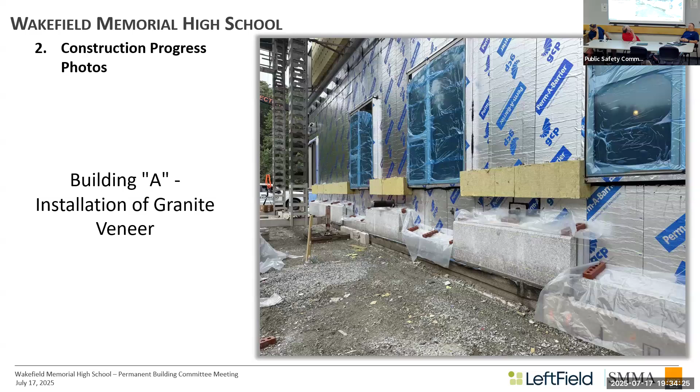How many crews did they have going today? Right now the lighthouse is only doing one crew. Once we get up to elevation, to kind of the roof line, a second crew is gonna go on the roof and work their way around. Then once they're done, they'll drop down at E and start working their way around, trying to meet somewhere probably around the end of D buildings. But they only have one crew laying this whole side? Yeah. Interesting.

Yeah, it's kind of like a blown out shot of it. You can see the Z-girts that Sunrise installed. Lighthouse right now is installed on the mineral wool. Well underway. Who sets the first brick?

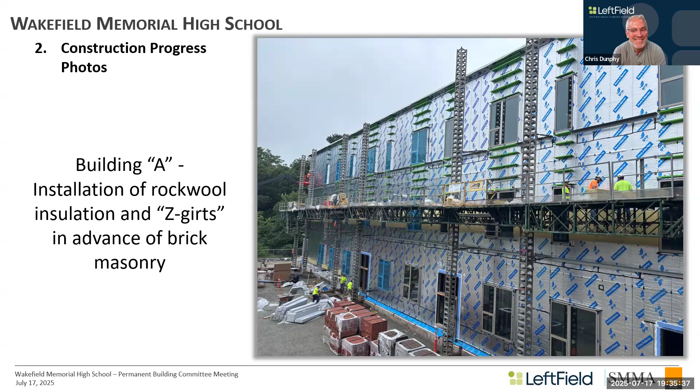How cool is that? Random. Maybe a million brick lottery. We'll let Marcus do the first brick. One brick, so it's really... And then they'll take it off and do it right. Yeah, not amazing. All right, next photo.

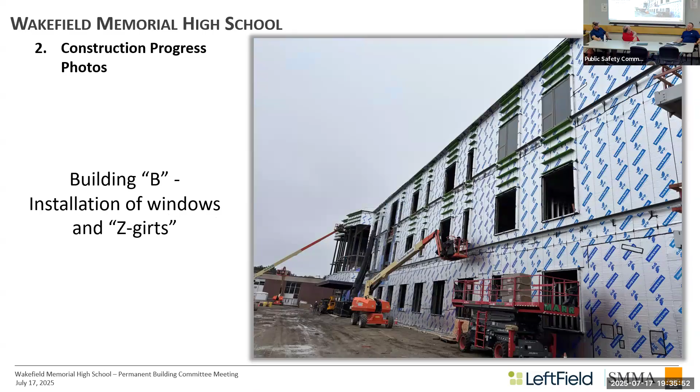Okay, so this is the west side of building B. You can see they're installing windows. You can see the sheathing going on, just kind of getting ready for the mason to come later on.

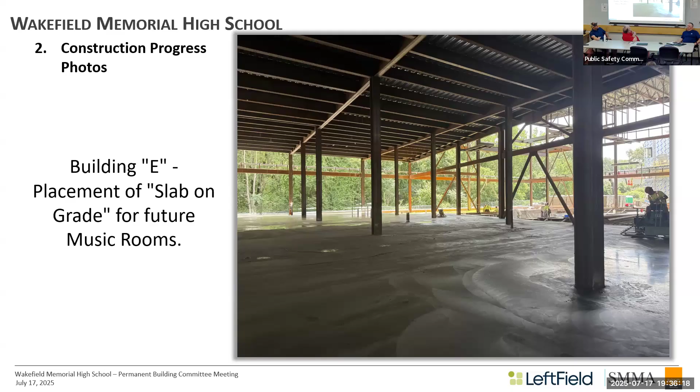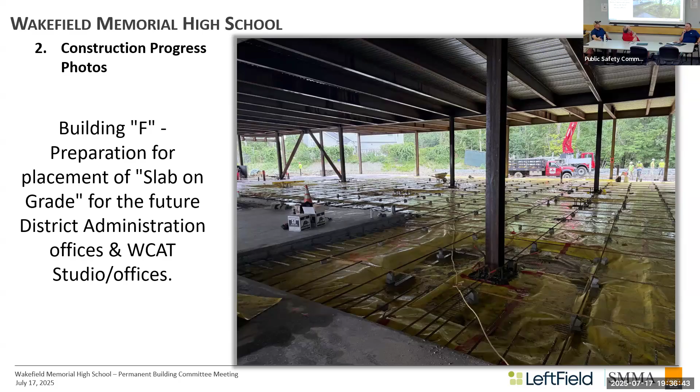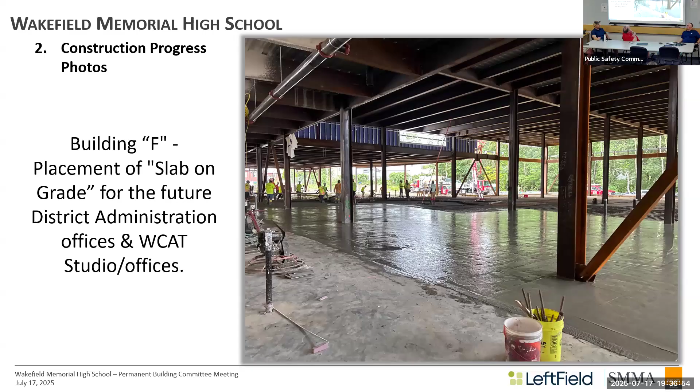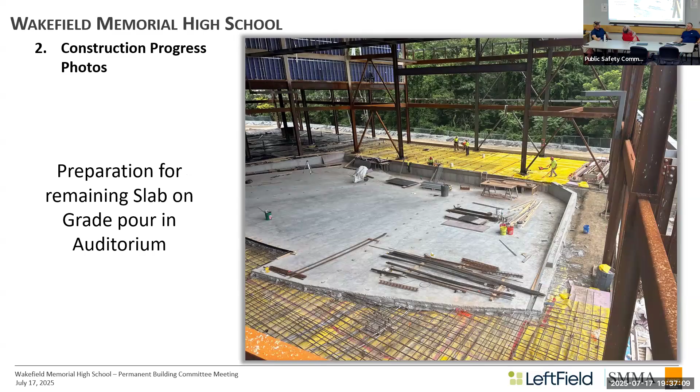You can see we did the slope already. We are prepped and kind of ready to go on this pour, which we're targeting hopefully Wednesday or Friday of next week.

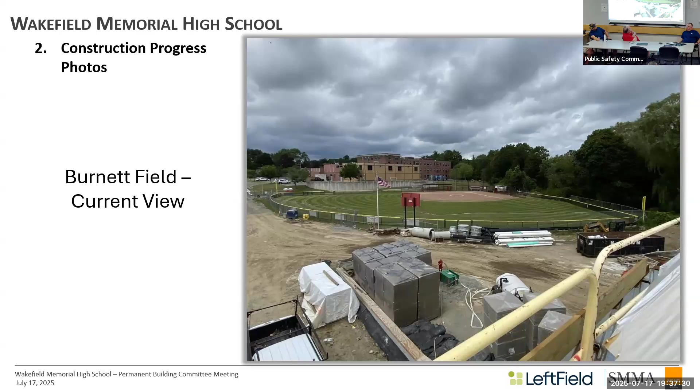Current view of Burnett Field. I believe that's them fertilizing it this week.

All right, construction update. So on the bond building, we're working on installing the parapet blocking in buildings D and F. We're also installing the roof curb infills on C3 and D3 roofs. The exterior building mock-up, we had the waterproofing company do those final sealants.

Sunrise is working on the sunshade bracket reworks and the extrusions, getting that done, and then they'll follow up with the metal panel installation pretty soon.

Interior classroom mock-up, we board taped and applied a primer on it. Homer is coming back to do a first coat on Monday, and then we're gonna have K&K on site Wednesday to solve the ceiling grid, to allow the MEPs to start dropping in their material.

Site work, Quigley's kind of off-site, but they popped back in to do a backfill on the south side of the auditorium we just saw, after the wall placement, so we can start prepping and get that poured out.

Concrete, Marshall placing topping slabs in the building A terrace and in the slope area in building E, and then just working through completing the slab on grades that we saw in the auditorium and F building.

Masonry, lighthouse, they're going to continue the granite base and flashing on building A. They started brick, like I said, today, and then they're installing CMU curbs on D3, E, low roof, and the green roof.